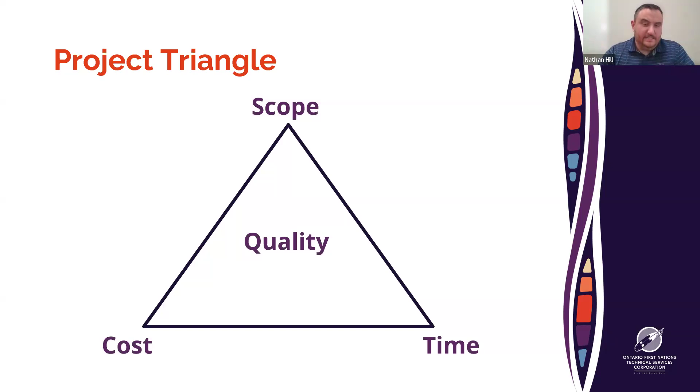So basically, changing any one of the factors will often have an effect on the other two, and the quality at the end. So just the basic principle of a project.

The presentation itself is going to go through six stages of a housing construction project, concept all the way through closeout.

These are not necessarily set-in-stone stages, but they are going to vary quite a bit depending on the size of your project, the scale, the scope, again, the number of homes you're building, all that sort of stuff.

And we'll go through that. Generally, they'd be a fairly accurate representation of the stages of a construction project.

So first of all, concept. Concept is generally when a First Nation would have a need, and the project would be initiated to meet that need.

Generally speaking, for most of us here, I would think, First Nation communities would want to address the housing shortage or add additional housing to the existing housing stock, to occupy members of the community.

It could be the construction of a new home, replacing an existing home, or renovating a home that already exists.

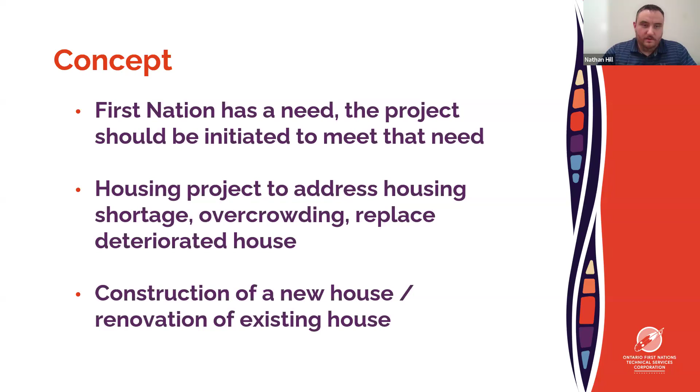The need that the First Nation has should be clearly defined, and the project should be tailored to meet that need.

So basically, the number of bedrooms, the type of construction, the size of the homes, all that sort of stuff should be taken into consideration at this point of the project.

Some communities have a waiting list, a survey, a community plan of the type of housing that their community members want.

Maybe they've built various styles over the years, and they kind of have an idea of the type of units that suit them best.

If a lot of the population consists of growing families, say 1 to 2 bedroom units may not be sufficient. You may be looking at larger 3 to 4 bedroom units.

Alternatively, if you're building for an aging population, a higher number of smaller, maybe 1 to 2 bedroom units, may be a better fit.

But again, this is the point where that need would be identified, and the project should be tailored to meet that need.

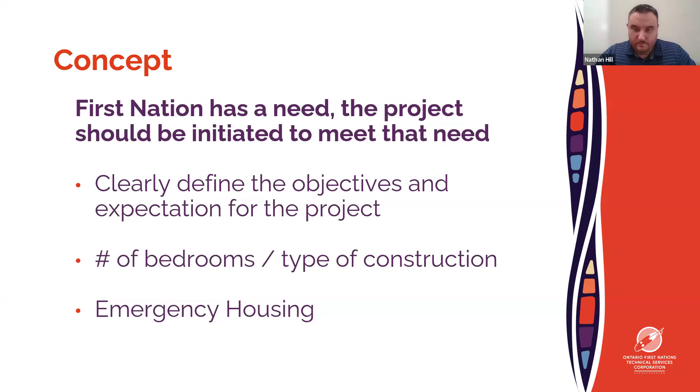Generally, a community may have a waiting list, so you have an idea of whether a family is looking for a home, an elder, or a single individual looking for a home, and it would tailor the type of construction you're looking at. A lot of communities don't have the luxury of choice as it relates to the type of housing. More housing is always going to be a good thing, but if there is a need that is clear and apparent, the unit should be designed to meet and address that need.

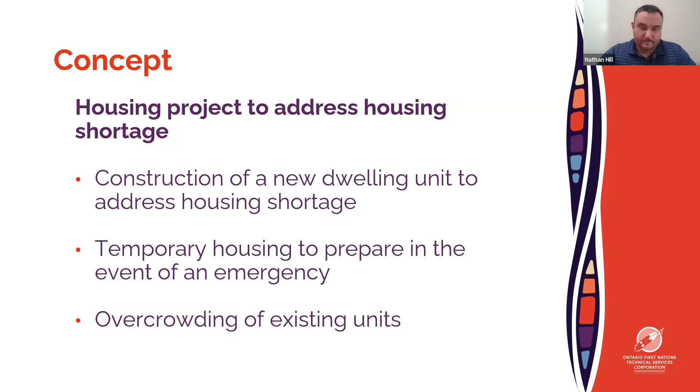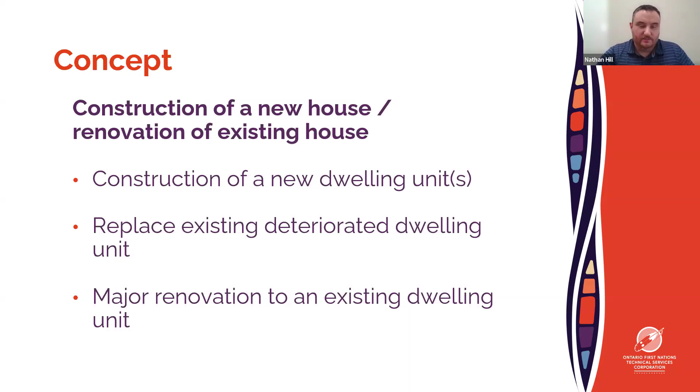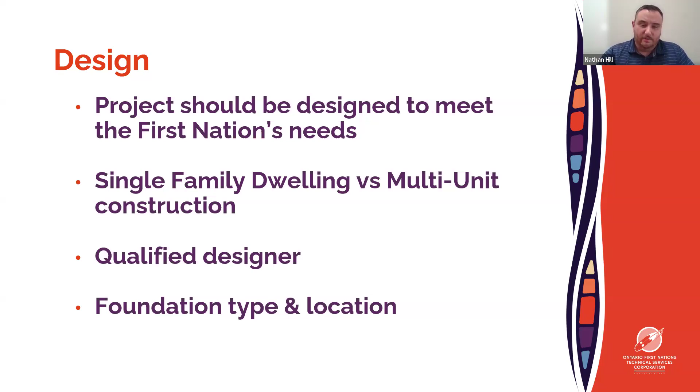Again, considerations include number of bedrooms, layout, maybe you want a certain number of units to be accessible, or all of the units to be accessible, or able to be made accessible in the future. Single story versus two-story or more is also a consideration at this point.

Building to your geographical location matters—designers will size and space structural framing members based on the proposed snow load for a specific region. If you take a set of drawings from a different region, they may not be adequate to support snow loads for your region. We've seen this before, where a set of drawings from the United States was designed for that specific region, not taking into account the climate where the units are actually going to be built. So the design should take that into consideration.

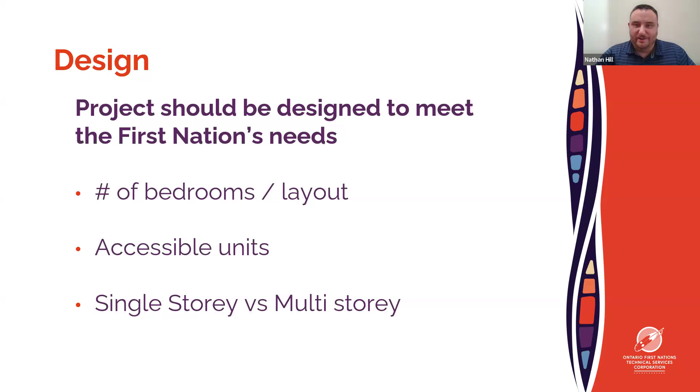Design—again, the type of units, how the units are designed to look. Detached, so a single dwelling, a lot of people would likely be familiar with, not attached to any other unit. Duplex, either stacked or side by side.

Again, how the units are designed and implemented may depend on your community, your project team, your design team's preference, or your funding source dictating this. But at this point is when it's determined how they would look—a duplex sharing a common wall, a townhouse, row house, triplex, fourplex, fiveplex, where you have multiple units sharing common walls and fire separations between each unit. Again, this is when that would be determined.

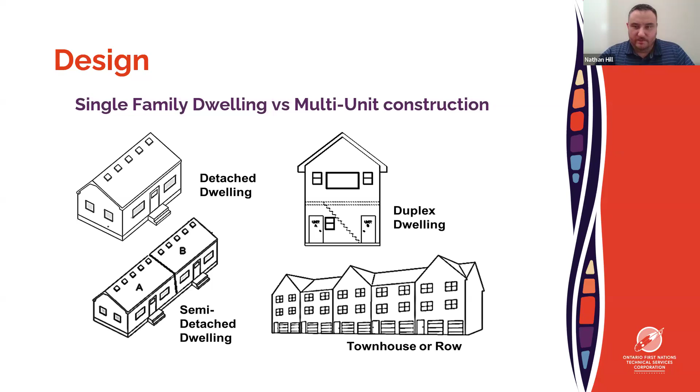The design should be completed by a qualified person, whatever that looks like for your jurisdiction. For us here in Ontario, that's a professional engineer, professional architect, or somebody holding a BCIN, their qualifications under the Ontario Ministry of Municipal Affairs and Housing. They should be the ones providing drawings, and their credentials should be indicated on the drawings, showing their qualifications and limitations as far as what they're able to design and propose.

Drawings should be up to date. We've seen drawings that are five-plus years out of date, with code changes and how the construction industry evolves. A set of drawings can fall out of date relatively quickly—maybe insulation values are no longer relevant, not up to current standards. So you're falling behind, not building to the relevant code of today, and losing out on quality over the long run.

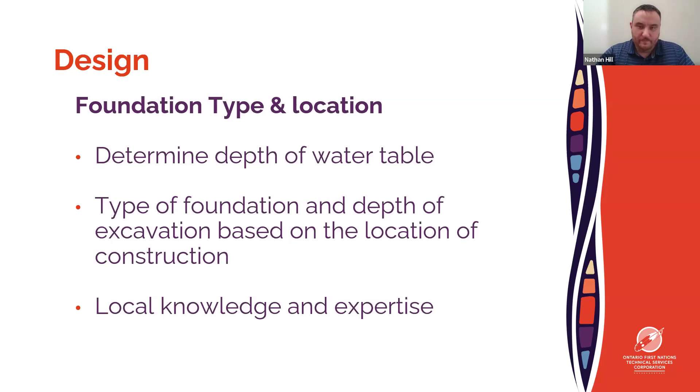Pre-construction involves bidding for contractors, site selection, site prep, and utilities. Maybe you're planning on hiring a general contractor to oversee the entire project, or maybe the First Nation has the capability to hire subcontractors directly and manage foundation, framing, plumbing, electrical, etc. Generally that requires more administration and expertise on the First Nation side than hiring a general contractor. It could save money compared to a general contractor taking on that administration, but if the community doesn't have that level of expertise, it may not work out over the long run.

Any contractors bidding on a project should be bidding on the same information. If there are changes or updates to the drawings or site, that should be disclosed to all interested bidders so they have the same information. The lowest bidder shouldn't always be the automatic winner—I've seen contractors make mistakes in their bidding, which is why they ended up lowest. Bids should be reviewed to make sure the pricing is accurate, based on the actual construction documents, and that everything is included. You don't want to reach a point during construction where something wasn't included, because then you're dealing with administrative and logistical issues.

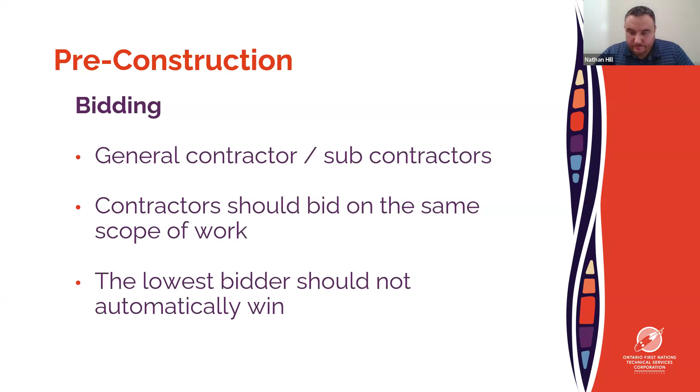Site selection. So again, this is maybe some element of local knowledge and expertise that goes a long way for something like this.

If you're maybe starting a subdivision, constructing a large number of homes, or one unit in a certain location, that may have already been decided, but things like the depth of the water table, the soil type for that area, that soil type common in your community - a lot of those considerations should factor into the design itself. A site that is difficult to get to will often increase the costs and make it more challenging in the long run as far as constructing.

And I guess just a consideration that I wanted to include was radon gas. So if anybody's unfamiliar, radon gas, my understanding is the leading cause of lung cancer in people who don't smoke. So it's something that's, in the construction industry, in building codes, all that sort of stuff, is becoming a little bit more common, a little bit more identified.

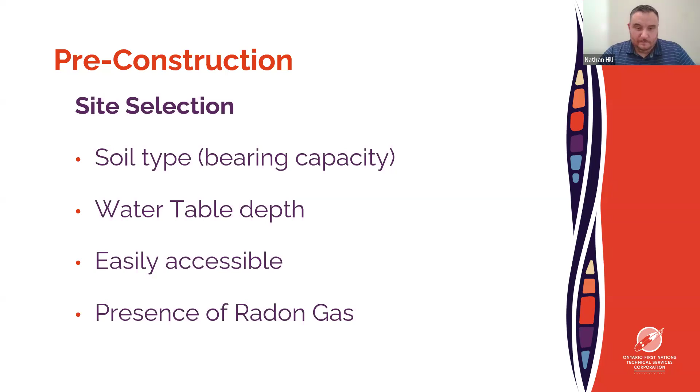Site prep. So again, clearing, lot clearing. The lot may be clear, may not, may require removal of existing vegetation, trees, preparing the raw land for construction. And again, that's going to vary quite a bit by the scale of the project, the scope, the size of the lot, the number of housing units being constructed.

Your foundation design may include a required bearing capacity for the soil that is supporting the building. Different soil types would typically have different capacities that they're capable of supporting. If you encounter soft clay or loose sand during construction, they may not be adequate to support a foundation type, and may require additional measures such as a geotechnical investigation to determine the bearing capacity.

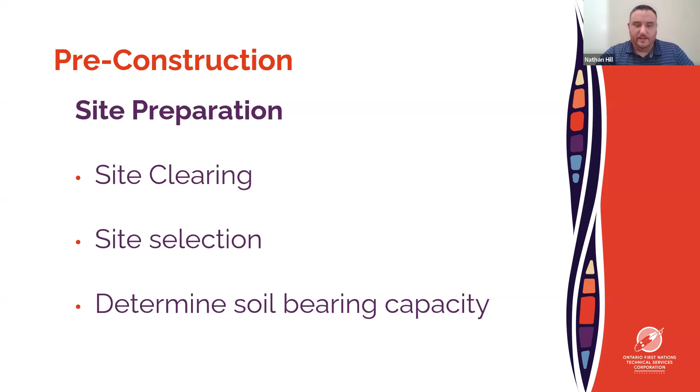So again, some of that local knowledge would go a long way for that. If you're building on an area that was filled in, not properly engineered and compacted, well filled, may run into issues with supporting.

Pre-construction, so again, your utilities, water, wastewater. So maybe you have piped water, piped sewer nearby that you're tying into. Maybe using a different water source, a well or a cistern, if a portion of your community isn't on a dedicated water line.

You could be installing an on-site sewage system to handle wastewater that's generated. Generally a well or cistern in combination with an on-site sewage system is going to necessitate a larger lot size than piped water and sewer. So definitely something to consider - how the lot is arranged, the size of the lot, where some of those would go, and if there is an on-site sewage system, where it's going to be located. And again, other utilities, electricity, above ground, underground. If your community has natural gas, propane, again, where those might be coming from, and getting them to the site.

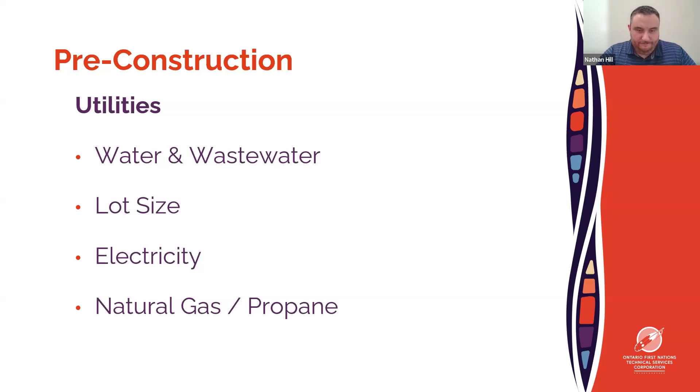Procurement. This is one that is going to vary quite a bit, depending on the scale and the scope of the project. So if you're building a single home, a single dwelling unit, the procurement stage may be relatively straightforward, relatively minor in scope. If you're building 10 units, 10 single family dwellings, a couple of multi-unit buildings, procurement stage is generally going to look quite a bit different.

Procurement basically means purchasing, acquiring, stockpiling large quantities of materials that you're going to use throughout construction. Timing that can generally save a bit of money where possible.

It can help offset cost fluctuations that unfortunately seem to go in one direction, and that's up. Purchasing and stockpiling some of this material at a certain point can at least lock in pricing and help provide maybe concrete numbers as it relates to budget.

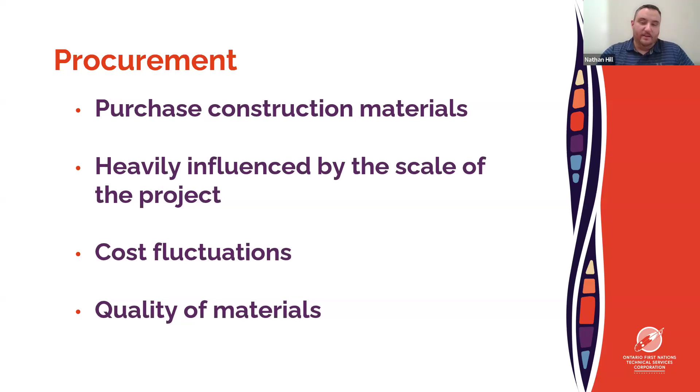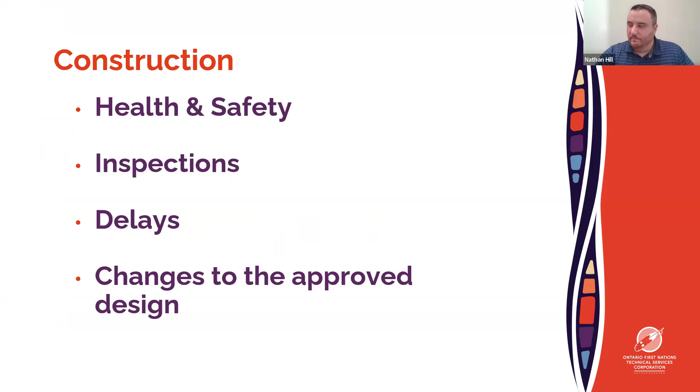Construction. So now we've gone through all that, now we're building something. So health and safety, in my opinion, should be a top consideration, should be very important. Inspections, again, throughout the process. Delays are inevitable, they're going to happen, and changes to the design and what that could look like.

Health and safety, again in my opinion, should be a high priority. Determine who's responsible, who's the responsible party for site safety. Generally speaking, the constructor, at least for us here, is the one responsible for construction site safety.

I don't know if it's as simple as that. I wouldn't profess to say that it's as simple as that. So I generally encourage anybody to have a policy requiring appropriate PPE: steel toe boots, hard hat, high visibility vests, all that sort of stuff on site.

I've been to sites where it's not required and nobody's wearing it. I've been to sites where it is required, and you're not walking on site unless you have hard hat, steel toe boots, high vis vest, all that sort of stuff. Generally speaking, anybody from our group is traveling with that equipment and exercising that on site. But I would encourage that for any community to have that as a policy on their site.

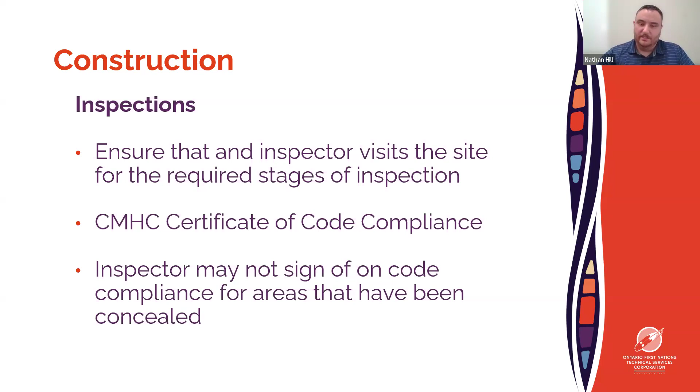Again, delays are generally going to happen. You're going to have a schedule at the start of a project, but unfortunately it doesn't always play out the way that you may have planned, and delays are generally very likely to occur.

It could occur for a number of reasons: weather, staffing issues from the First Nation, staffing or scheduling for contractors or subcontractors. The plumbing contractor can't start until the framing is done, but the framing contractor may be waiting for windows and doors to arrive on site to install. There's a number of trades that are going to be kind of working on top of one another to get the project through to a completed state.

And it's a balancing act at a certain point to make sure that everybody is there when they need to be, and that they can adequately and safely complete their work.

One delay on a certain stage could have an impact on the entire project. Delays are inevitable, and the construction schedule will likely need to be adjusted at some point for a number of reasons. That's where having a general contractor may be worthwhile, as they're going to handle those scheduling issues. Whereas if a First Nation is hiring subcontractors on their own, there may be a bit more administrative legwork on their end as it relates to scheduling and delays and making sure contractors are available.

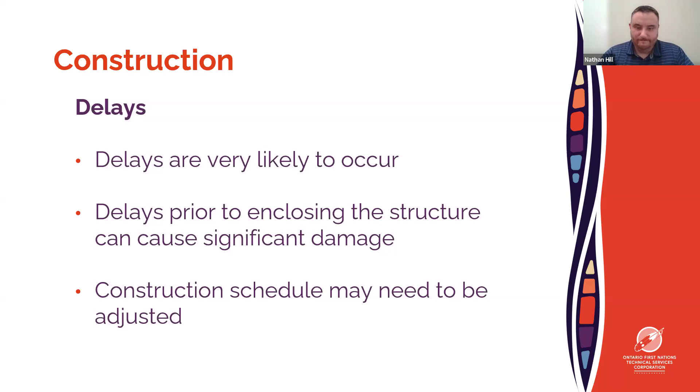Changes to the design. Again, there should be a design, as we talked about earlier, that's approved and the community is happy with, and that they expect to be built. Changes are not uncommon. The owner of the project, the First Nation, may want to make changes to the design at some point in construction.

The designer typically should be consulted on changes, especially changes affecting the structure or other major changes. Generally speaking, changes should not be made on site without proper correspondence with the community, the designer, and all that sort of stuff. If the designer proposed a certain R-value or insulation value for a ceiling or exterior walls, that is what should be installed. The assembly may be designed above minimum code requirements, and you shouldn't look at it and revert to minimum code requirements on site without that proper consultation. Unfortunately, that's something I have seen.

There's a design in place by a qualified person. That's what should be followed, right? Not necessarily asking, 'Well, do we need to do that? What's minimum code?' They designed it a certain way, so it should be constructed to that design.

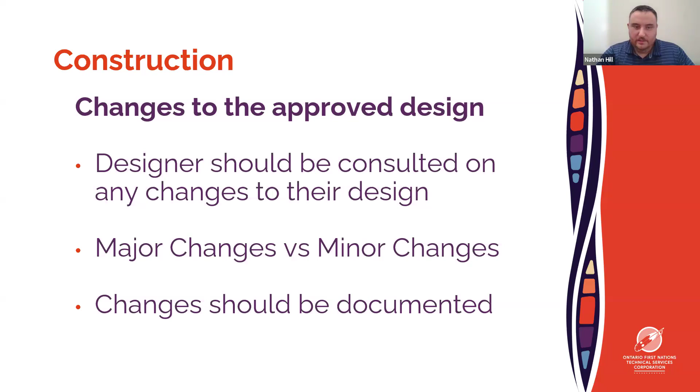Closeout. The project is done, the project is finishing, and what that kind of looks like includes documentation, inspection reports from an inspector, warranties that may be available, and maybe most importantly, maintenance.

Documentation. This could be a modular type build, a modular unit, which generally should include documentation such as CSA A277. If the unit is built to that standard, there should be documentation from inspections that took place in the factory, and that should be provided to the community, to the owner, to the First Nation, and be readily available for their review so they can retain those. The unit itself should include a label inside indicating that it was built to that CSA standard.

That label would include information for an inspector, or for somebody maybe looking at maintenance or repairs on the home in the future, telling them all the information they would need about what unit, what standard, and what specifications this unit was constructed to.